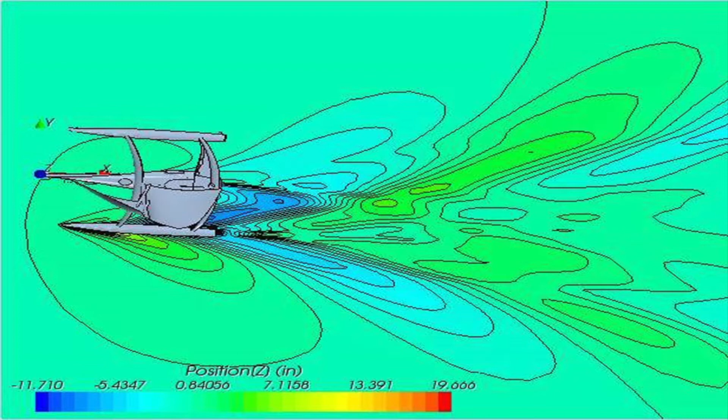The two of us worked with Long Beach State University to do the first coupled aero and hydrodynamic simulation. You can see in these stills that as the boat's moving through the water, you're seeing the pressure as it moves through water, and also the streamlines of how it's moving through air.

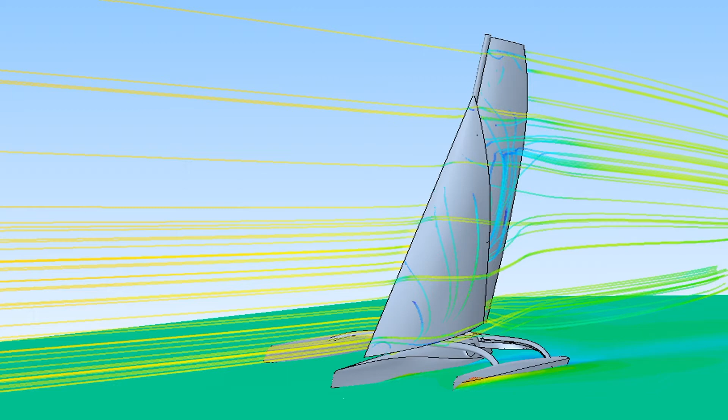What was incredible is it would take a cluster of 64 computers a week to run through one simulation for us. So on a weekly basis, we were changing the design based on what we were seeing and how it was behaving in this environment.

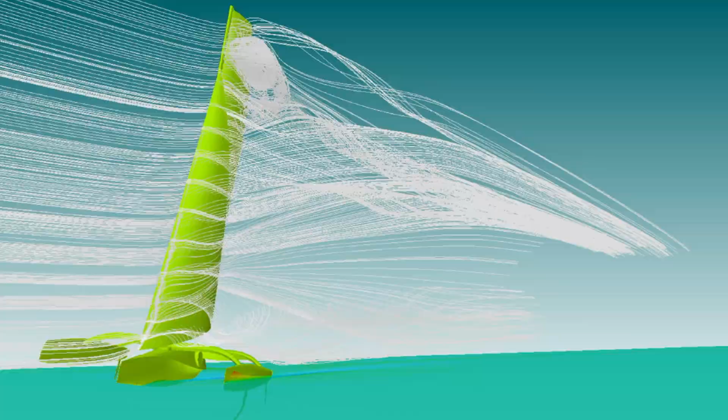We would literally take geometry, drop it into this environment, and with no animation, no keyframing, it would just take off. Because nobody was ever driving it, it always ended catastrophically. But every time, we were learning things about the dynamics of how this was working.

A lot of the decisions we were making about where to put buoyancy, how surfaces were going to move through water, how chines and elements like this were going to keep the boat from flipping over end for end, and how it would shed water as it moved, was verified in the performance.

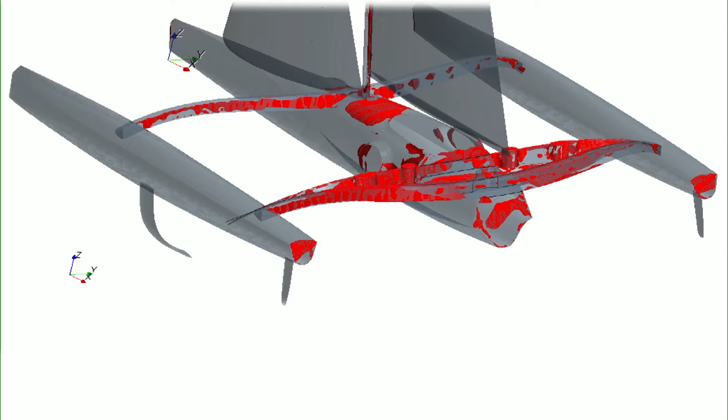I'll show you a couple quick videos. Also how air was detaching from the surfaces, which would create drag. This is a boat that goes a little over 30 miles an hour with just wind, and at that speed, drag actually becomes an issue just like it would with an automobile.

There's also a lot of 3D printing on this. The most critical components of the boat were all 3D printed carbon components. There's almost no metal on the boat whatsoever, and it was all built from CNC manufactured molds.

So what you were seeing in that simulation in terms of how the hulls are in the water, what kind of wake they're generating, and how the bows of the boat are handling water and buoyancy, was really a high level of fidelity between that dynamic simulation using computational fluid dynamics and the actual performance of the boat. Nearly no surprises.

As a matter of fact, some of the concerns we had were verified in things in the real boat that we've now gone back and retested and remodified, but mostly the foils, which are those big orange things that lift the boat out of the water so it can fly.

But anyway, the video footage and the simulation footage almost always matching, like one-to-one, with a very high degree of fidelity. If I could now bring that together in a moment, especially with augmented reality, where I could start to see those forces happening in real space.

The boat is also covered in sensors, both speed and stress and wind direction, and it has a computer on board. So if I could start to pull those things together in real time, which is what they're doing in the America's Cup boats, you get even more insight.

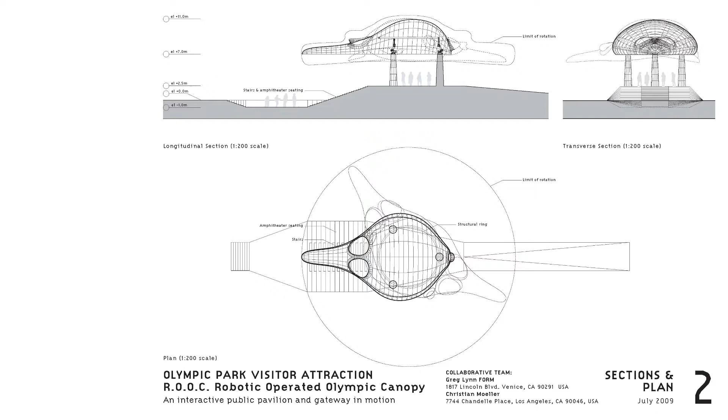I recently started to think about what parts of a building could you move, and how could you integrate robotics into structures. So a few years ago for the London Olympics, we were asked to propose a pavilion.

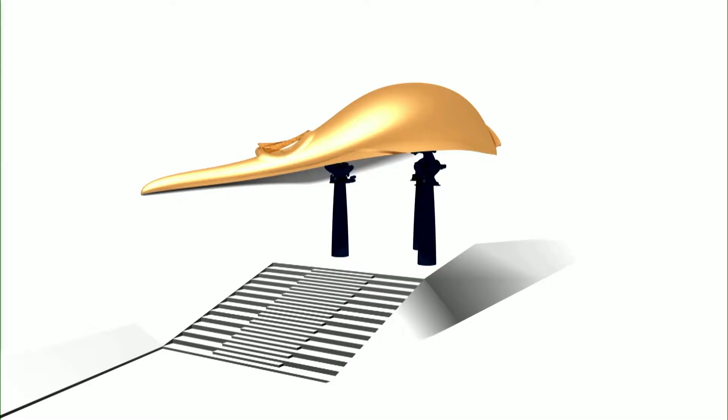Here we integrated just three. We were thinking about KUKA Titan industrial arms, but three industrial arms that could move a lightweight shell and spin it. But I've started to think about how to integrate robotics into building scale structures.

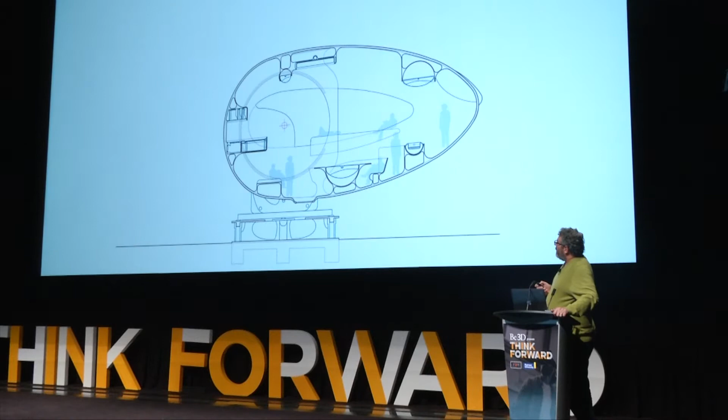Being able to visualize the motion with solid elements that can collide with each other lets you simulate that. I don't really think so much is important about the architecture here for this context.

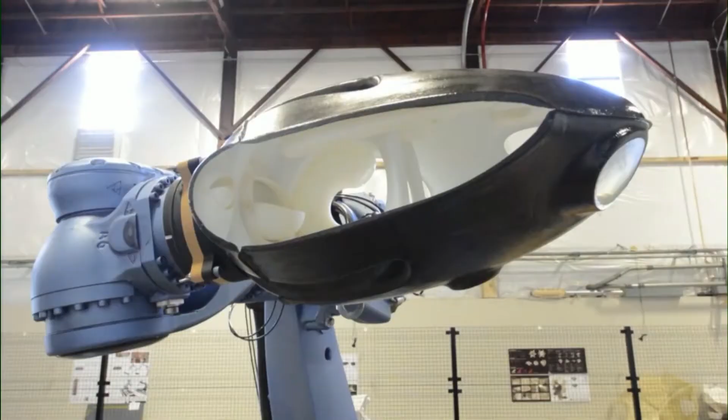I think it's more just about how it's kind of moved across disciplines and fields. This is in a robotics lab at UCLA I've got, where we use these large-scale robots to move models and even rooms around.

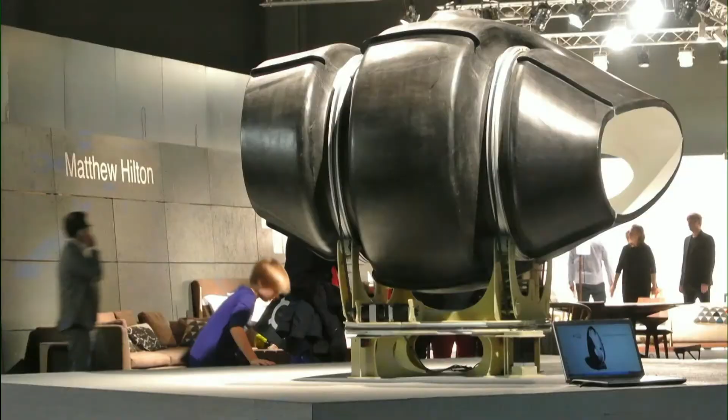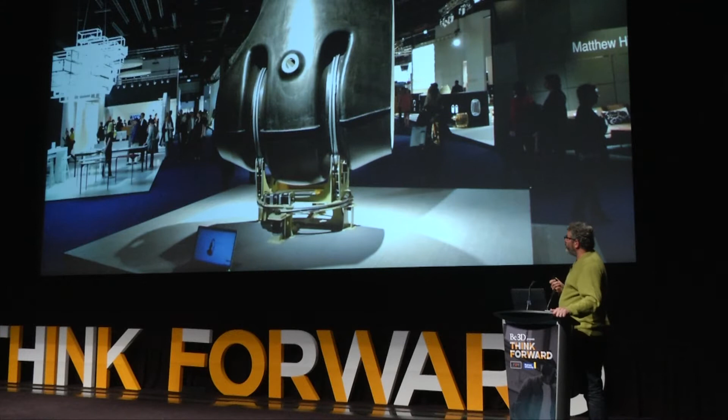In building one-off robots to study some of these elements, I got in-house the people necessary to do both the mechanical engineering and mechatronics—building the robots—as well as people to program them. I kind of accidentally started to move into a different space.

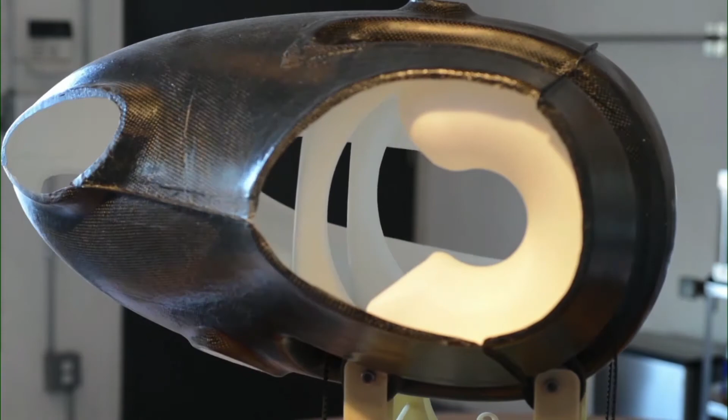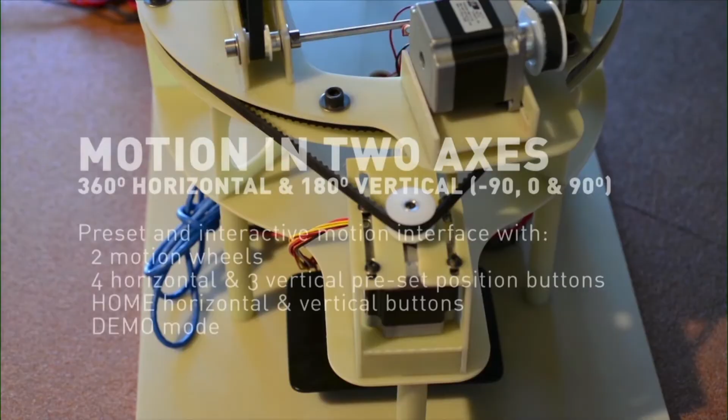The San Francisco Museum of Modern Art wanted to include this in an exhibition, and I said instead of having it just move on a loop, we should let people download an app on their smartphone and drive it. Using TouchOSC, a music mixing program, we built an interface where you could move the models interactively just by downloading an app when you walked into the gallery, uploading our screen onto it, and then being able to move this thing and run it through some presets.

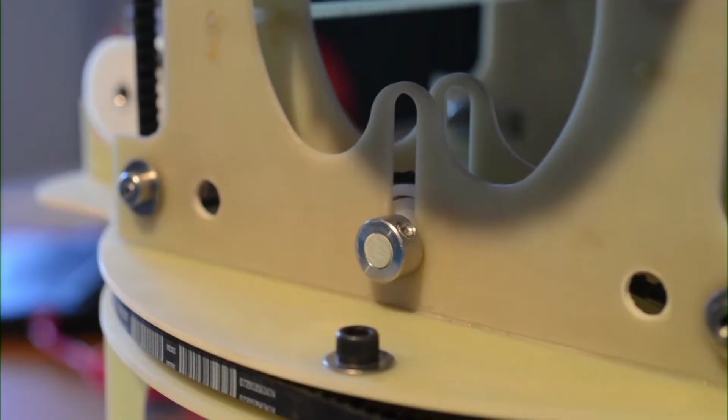So the ability to build the machine, control the machine, and then interact with people socially in a space really started to spread out some of the expertise horizontally, in a way that was pushing me a little bit.

Around that same time I met Jaron Waldman, who started a company called Curbside, and that immediately became relevant in terms of, let's say, little buildings—but more important than little buildings—in terms of how people move through cities and transportation.

It got me thinking a lot about—well, I would never say where the future of things is, because I don't really believe in 'the future of things.' I'd say opportunities in urban planning. I don't think anything is necessarily going this way; I just think this is where I would want to make things go, and it's an opportunity to be taken advantage of.

What Curbside does is turn a shopping mall or big box store into a fulfillment center. Instead of having a big fulfillment center outside the city shipping everything—so you order a tennis shoe and it gets hurled to your door by a drone or delivery person—Curbside tells you where those tennis shoes are in stores around you. You buy it, somebody pulls that inventory out of an existing store. So instead of pulling inventory from a fulfillment center, it pulls from all the neighborhood stores participating in Curbside, and they consolidate that.

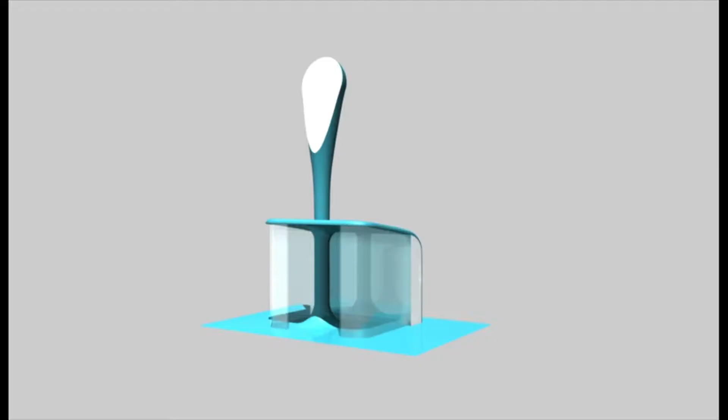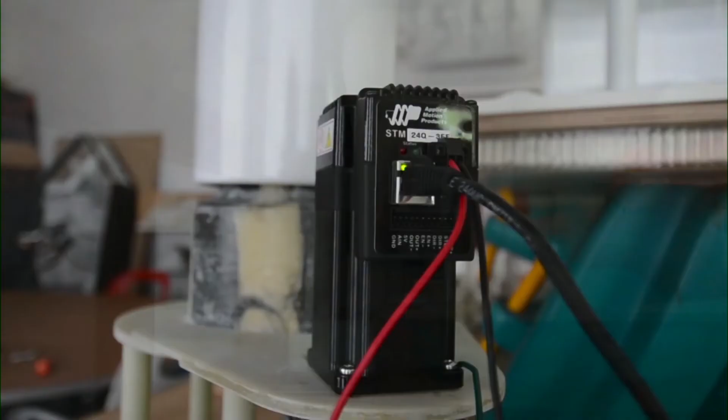The last thing we're doing now, as we look at installations with more than one pickup point, is we want you to know which one to go to—so we can localize you down to even one of, say, three pickup pods. We've got an antenna now that follows your cell phone signal and changes the background of your phone to match the color of the pin, so they know who you are, and you know which pod to go to.

So this kind of transportation and urbanism world has become very interesting. I want to show you something else we've been doing, but before that, I thought it would be nice to show you what I've been doing with Trimble and with Microsoft HoloLens.

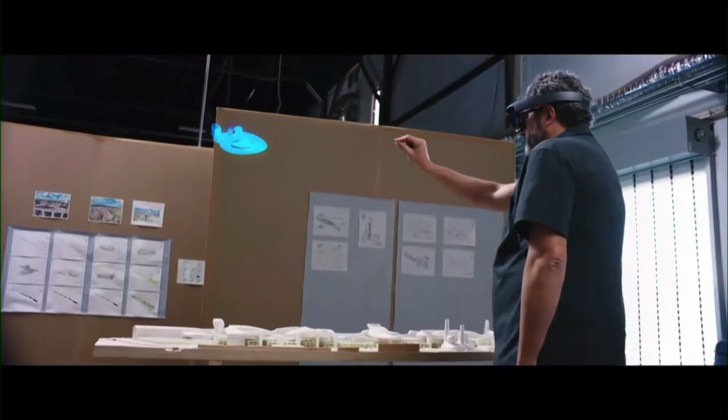How do I bring some of that virtual stuff and lock it to a physical model to give us a sense of scale, proportion, form, and space? Microsoft HoloLens is a wearable computer that lets you see holograms mixed with reality. It actually changes the way you think about design.

I live here in Venice, California. I teach at UCLA in the old Howard Hughes hangar. We were asked by the American Pavilion at the Venice Biennale of Architecture to be imaginative and show what's coming with architecture. We were given a mile-long building in Detroit that's been abandoned for 50 years to use our imaginations on. I'd known about the Trimble Microsoft partnership on the HoloLens and was just itching to find the right project to do a pilot with it.

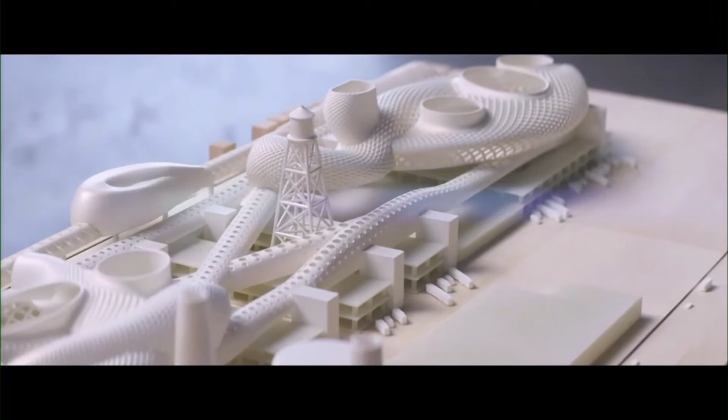So we built a model, but we used HoloLens to get us inside some of those spaces. I didn't know how big our site was compared to corporate headquarters or museums. With Trimble Connect, I can look up and grab different buildings to compare. We could just pull a model and duplicate it and see that it would take 12 Tate Moderns to fill the site. That brought it to life in terms of use.

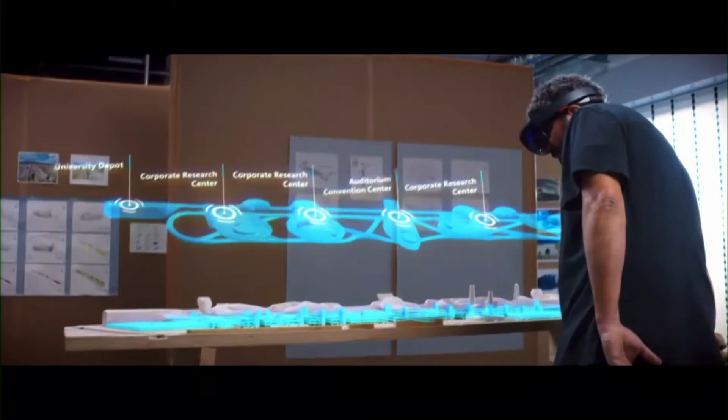Microsoft HoloLens lets us get inside stuff earlier and experience it, and I can look up and see the volume that I'm in and start to make decisions about how to design it. Without a HoloLens, I would have been making those decisions 3-4 months from now. But with the HoloLens, I'm making those decisions at the moment of inception.

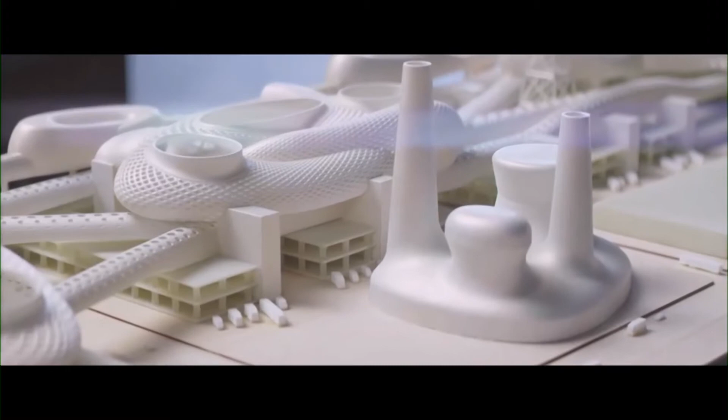In the redesign of the Packard plant, showing the dynamics is something that's very hard to do. HoloLens immediately solved that problem, and it explained why things were the way they were because they were meant for vehicles and people to move around. I think that gives you a little bit of a sense of how that technology works.

Crazy interesting to see what the world of entertainment and gaming is doing with these technologies. But for me, what's the most impressive thing about the HoloLens is, again, its localization—that it's building, as you move, a dynamic 3D model of the environment you're in that has enough fidelity that I can set something on the floor and it actually sits on the floor.

And if I walk out to the cafe and come back in, that device is going to recognize the room. It's going to recognize that position on the floor, and what I set there is still going to be there. For me, when I got the first HoloLens in my office about 8 months ago, what was incredible is we opened a bunch of files.

I put the device down, I came in the next morning, I put the HoloLens on, and all the stuff that was sitting there was still sitting in the right place. So that ability to know and map an environment is incredible.

So what you saw happening where I was dropping modifications onto a model, it's great to be able to see virtual things in the physical world, but what is amazing is that it is looking at that model and matching it to the 3D model that we've got and being able to bring those two things together.

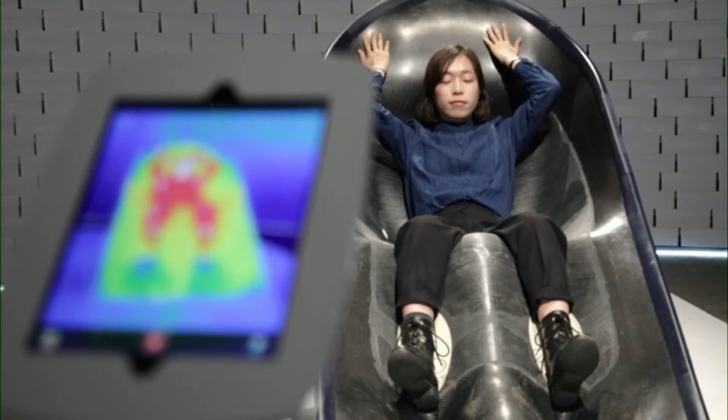I'm collaborating with Nike doing these chairs, which we call the microclimate chairs. But what we're doing is we're designing

temperature and moisture controlled environment in a very lightweight piece of furniture for elite athletes. You'll see these with the NBA next year. What we do is both modify an athlete during the state of play, but we're also pulling data off the athlete during the state of play. Pulling the data off is probably more, well, they're both very significant.

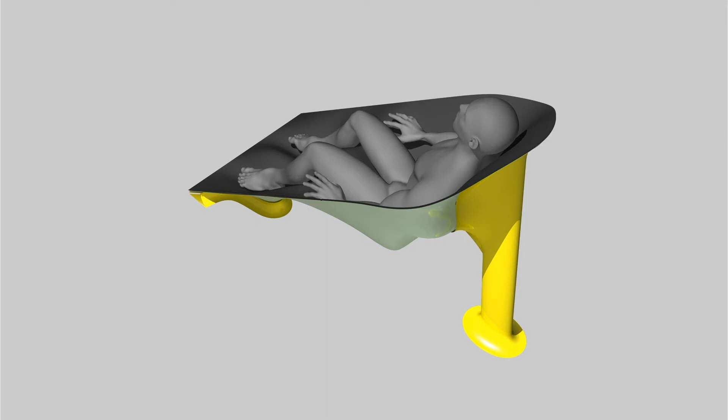So what we do is, the first one we molded actually on an athlete, but we found out we don't need to have such a tight fit between the chair and the athlete. The material is a material which I wouldn't really say we've invented, we applied for the first time.

It's a carbon fiber which goes continuously from being rigid to soft. So where you see those patterns of tape, it's soft, kind of like a hammock. It holds its shape till you sit in it, and then it turns into a tensile surface.

And embedded in that, we can put a bunch of Peltier chips, which you can control from hot to cold by changing the electrical current through them, as well as a series of temperature and moisture sensors. And also we weigh the athlete, so every time they sit in the chair, we know as a baseline if they're

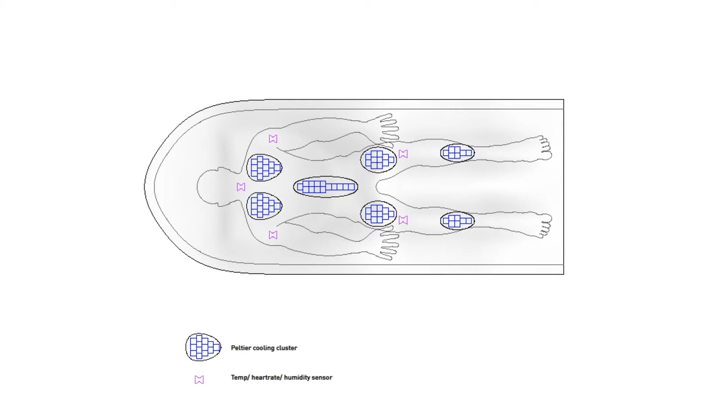dehydrating based on losing weight. There's a bunch of heat sinks to dissipate the heat that we're pulling off the athlete.

Although really, and we don't tell the athletes this, what we're doing is cooking them, because you want to keep them hot. So we blow air on their face, and we chill their spines, and we chill the back of their necks so they feel like they're being cooled, but actually we're raising their body temperature and we're heating up their legs and arms so they don't get stiff.

The very first prototype we did is much more reclined. We don't have this kind of real estate on a basketball court. But you can see the thermal camera taking the video of the temperature of the chair.

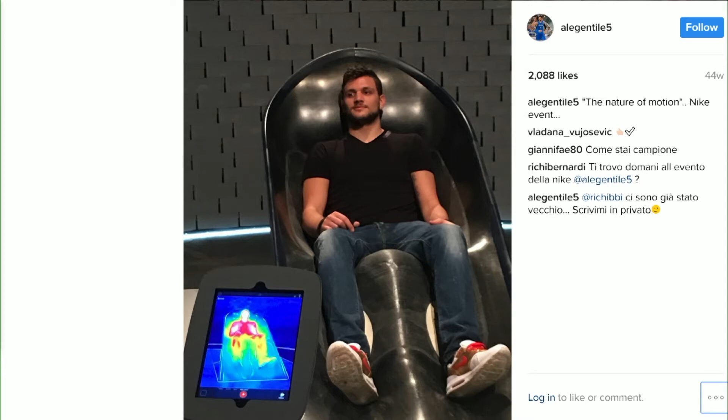This is Alessandro Gentile. He's bigger than me, much fitter than me. He's about 6'6", 6'7", which is your average NBA athlete. So that's the size it was made for them.

But so we're pulling information off of him. Even through the clothing, we can get a lot of temperature sensing. The perimeter of it is all a 3D printed air channel that blows air onto his face.

And also even, you feel it on your arms and legs, but we want to get as much of the arms and legs encapsulated in there as we can. So it's really like a tiny little oven. And there's some of the thermal imaging of it.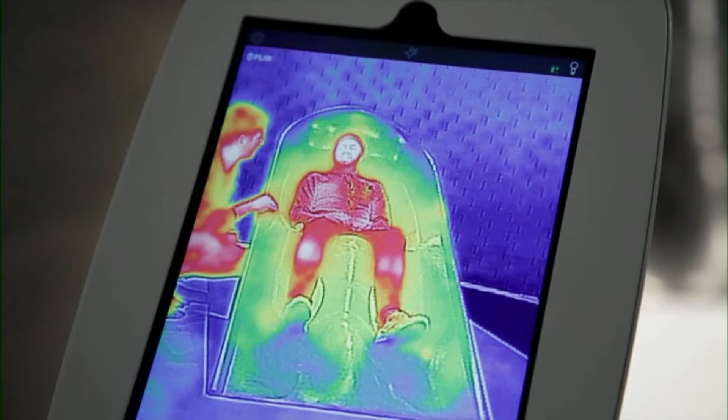So, building a microclimate like this, which is intelligent and is pulling data and modifying data, it's funny, it's something I pitched to well, three of the largest furniture manufacturers in the world, two of whom I have furniture in production with. They all said, we know we have to do this, but we don't want to, so come to us when our competitor's doing it. Whereas I just casually mentioned it to John Hoke from Nike, and he immediately said, we need this, we feel like we're 5 years behind, let's do this right away.

I know exactly the sport we should do it for. So for me, it's this ecology of machine vision, whether it's stresses and forces and environment, whether it's people and their temperature and their body state, whether it's a 3D map of an environment and mapping how many people are in it and how they're moving and recording it.

Being an architect is really now completely changed in terms of responsibilities and opportunities. So I really think it's now about not designing spaces for machines, but designing spaces for people and machines to work together, to move together, and to have a kind of intelligent fusion. And the obvious place where people and machines are working together the most are factories.

This is some footage from that Packard plant, which was just a kind of hypothetical project done for the Venice Biennale. But our idea was to take this existing factory and think about what it would be today if you were to bring in a fulfillment center and a manufacturing center and a university all kind of onto the site, like Cedric Price did in the 1970s.

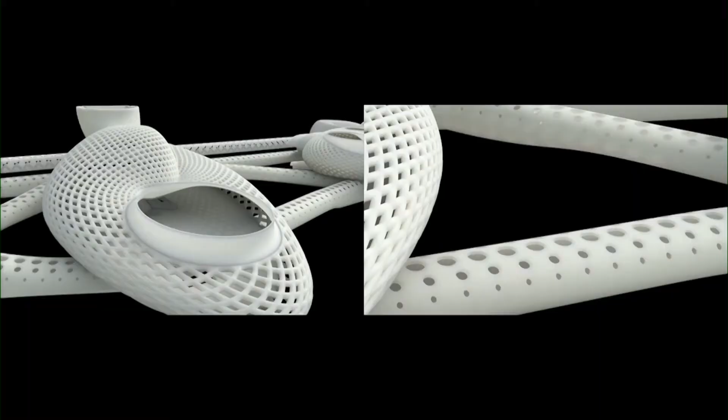And what we came up with was this idea, instead of a gantry, which is a crane that moves things through a factory, which is the old idea of a factory, to think about a kind of a little mini freeway for everything from the scale of a forklift or pallet jack, which is automated, down to small, lightweight point-of-use carts that might move around. So people and machines, the people would move on the first 3 floors, and machines would move, instead of in a gantry, in these kind of tubes.

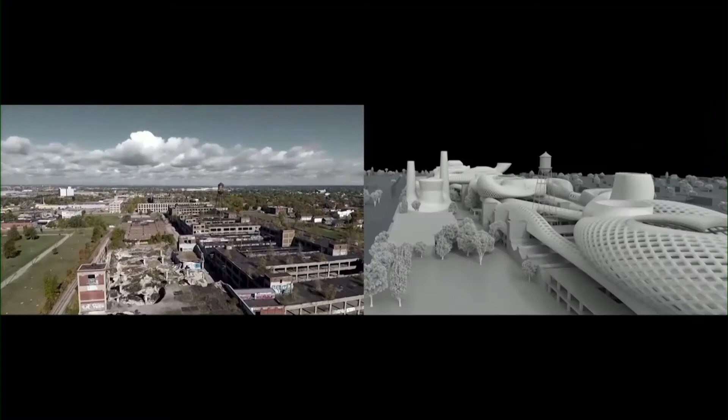I'll show you how in the last couple of months this has moved to a real project on Lake Como in northern Italy, which is also an old factory.

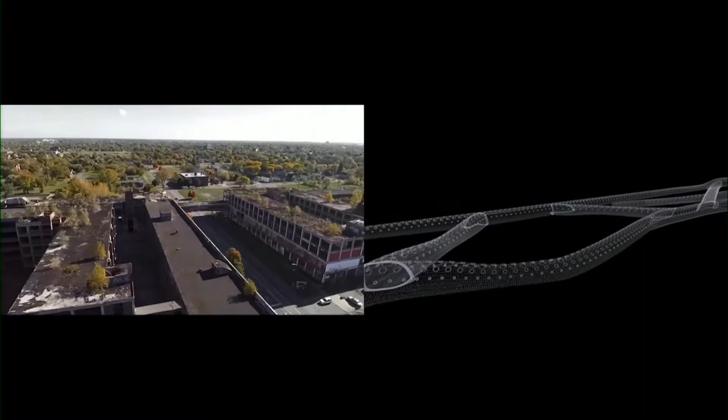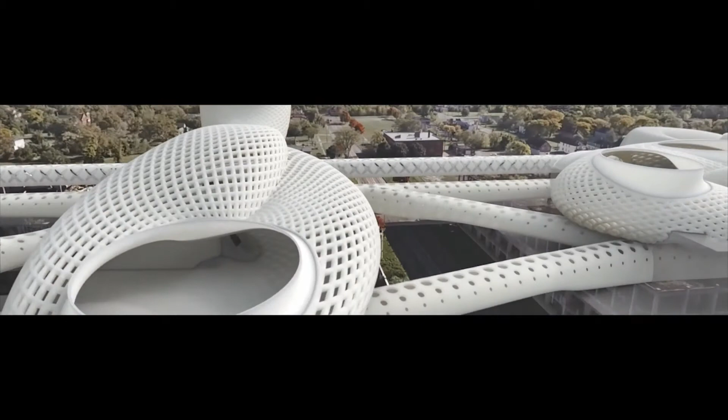For this project we shot everything with aerial drones. I went to the site, but frankly I spent most of the time looking over the shoulder of somebody with a tablet with an aerial drone. We were using the HoloLens. It was a fusion of all these things.

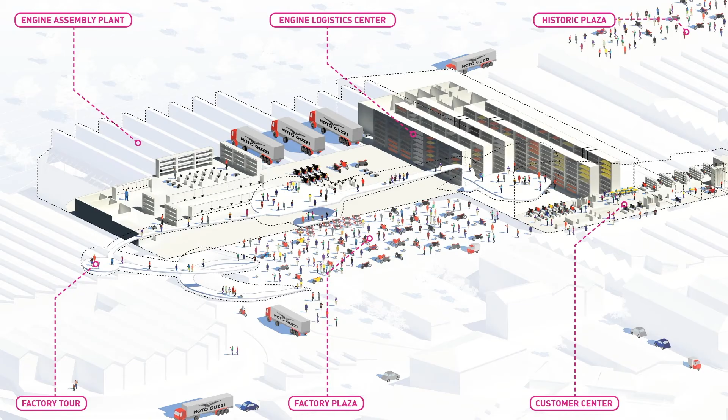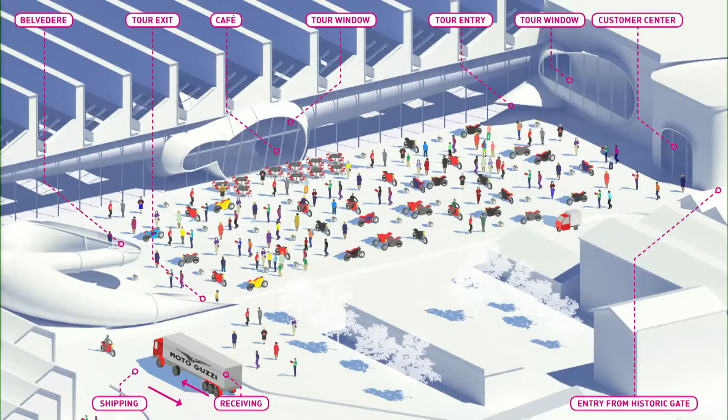In Lake Como we're now doing something similar for a smaller scale renovation, where we're building a new engine plant and plugging into an existing assembly plant. You can see we're building a plaza so people passionate about the brand can come visit the Moto Guzzi factory, but instead of having the people only moving through the factory, they get into this tube and get led by machines through a view of the factory, entering spaces where it'll be primarily machines doing the work.

That has led to a foray into vehicles, but really my role here is not so much designing the vehicle - which is my job, I have to design the vehicles - but really we're trying to design cities, design sidewalks, and provoke a new kind of fusion between people and machines. It came out a little bit from this.

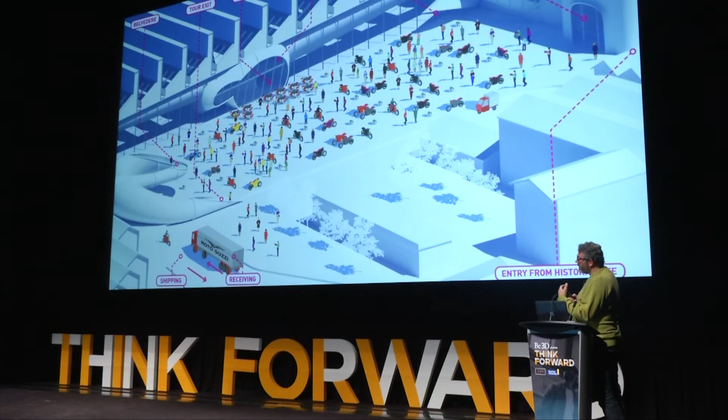If you see these little balls around for scale to the motorcycle, we had an idea that the path people should be led around, they'd be led by these little guides. Our idea was primarily to have something autonomous that would do that. What ended up coming out of this is something which is not autonomous at all, but something that's all about the partnership between people and machines, or people and robots.

A year ago, I co-founded a company with Jeffrey Schnapp and with Piaggio - Piaggio are the people who invented the Vespa - called Piaggio Fast Forward. It's all based on what you call SLAM, or simultaneous localization and mapping.

That's how HoloLens works too, it has stereo cameras and does on-the-fly SLAM, using those stereo cameras to localize and map. So it builds a map, puts you in that map space, and compares that against the world continuously as you move.

Our idea is really that we're starting from people and what people might want in the city. So you see that person, Jared, getting followed by our vehicle - I don't call it a robot, it's a vehicle. It carries 40 pounds of stuff and follows him in a very sophisticated way. It's building a 3D map of the world.

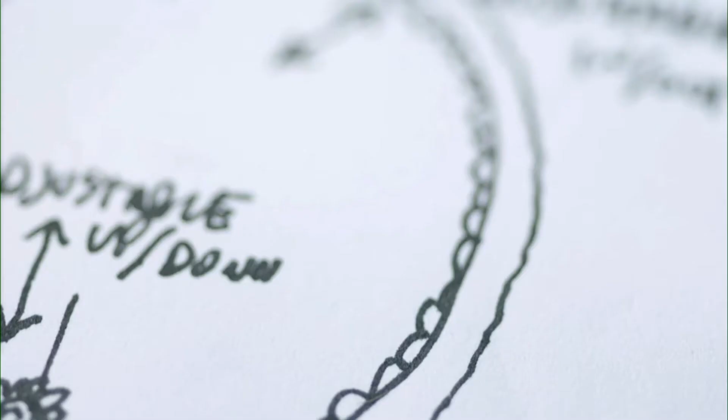Because we come from Piaggio, we see cities in a different way than an automobile company. We think about people moving in a granular way. Granular mobility is a concept we've elaborated within Piaggio Fast Forward to call attention to those spaces that we navigate as pedestrians, as citizens of the 21st century city.

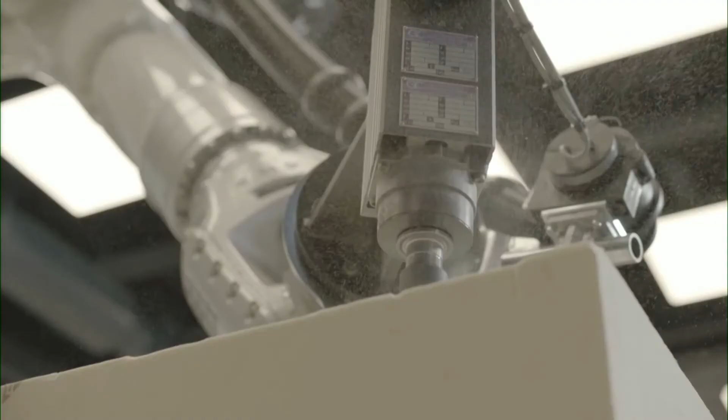We thought, let's try to make a product which engages all those different cities and the way people move in all those cities. Gita was designed to leverage the power of human navigators of urban spaces to make sense of them. We imagine it as a kind of Vespa for the 21st century.

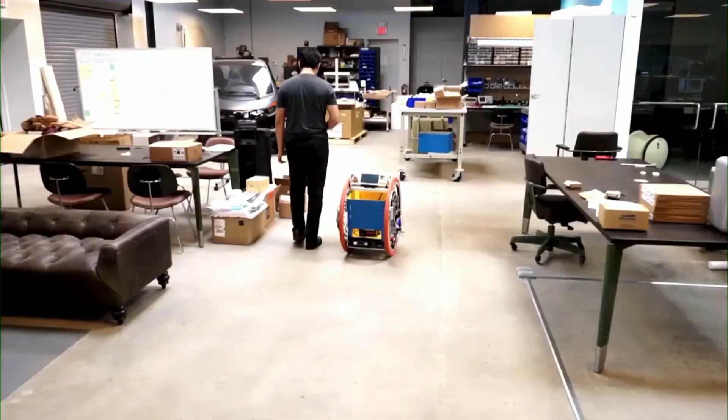Gita is thought to help the human, from a young kid at school to an older one in a hospital, for instance. It's a total fusion of two technologies. It's a land drone, it's a cargo bot, it's a Sherpa, and it's a smart device that learns the environments and maps them as it travels them with human guidance.

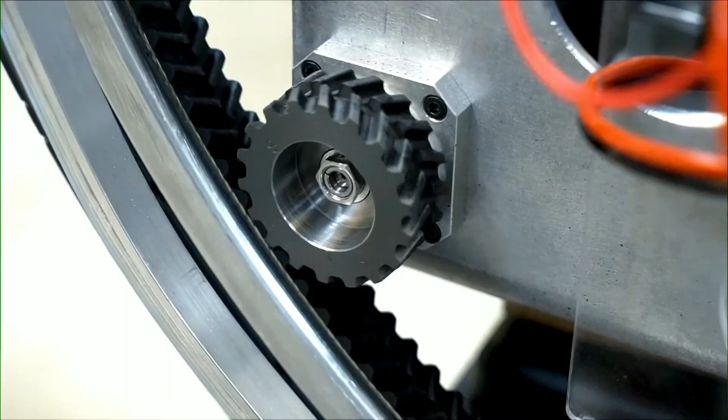It moves as slowly and can maneuver the same as a human, and it can move as fast as a human can run, and everything in between. It can also comfortably carry about what a human can carry.

Gita has two main purposes. It is thought for goods transportation, for people transportation, and to mix them to help people.

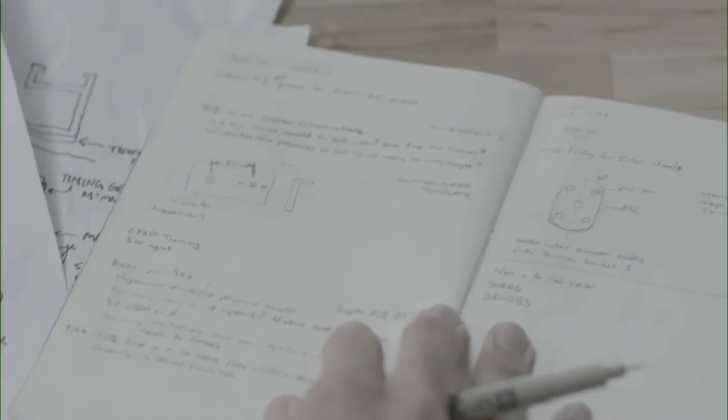And we see a future where city streets are not full of autonomous cars, but people walking, jogging, riding on lightweight devices like skateboards and bicycles. We believe that the 21st century will be the century of robotic movability.

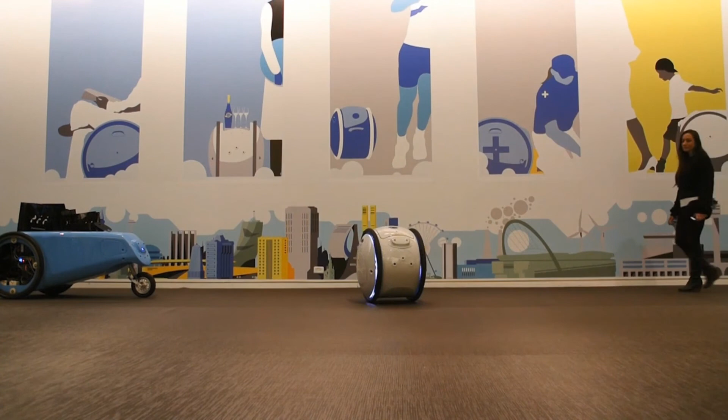Okay, so here you see three of them following three people in a really small space.

But I guess in kind of closing, for me, this is augmented reality. This is literally exactly the same as a HoloLens. It's building an environment. It's making decisions about what that environment looks like, what the surfaces are that it can move on, what's an obstacle. It knows what a person is, so it can delete people out of a scene in terms of building the three-dimensional scene. The only thing that's different is it's not about putting that now on my eyes.

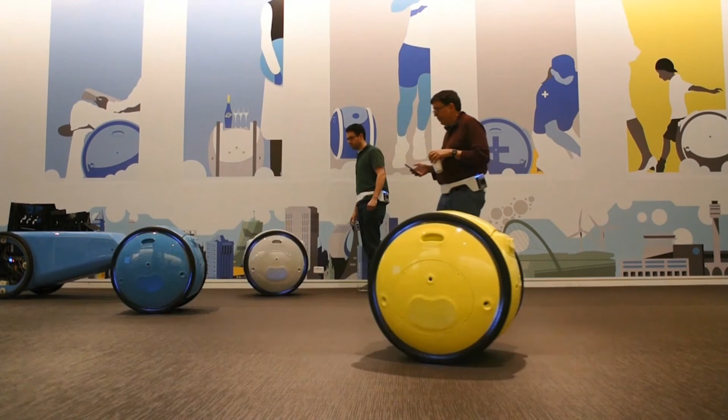This is a machine with vision, and so my job is we've got dog trainers and falconers and horse handlers all coming into the office and talking to us. We're trying to figure out when you go through a door, how do you hold a door for - sorry, the product's called a gita, which means short trip in Italian. So when you open a door, how does it go through? Does it follow behind you? When does it come next to you? When you have to program it, meaning sync up with it, it gets in front of you. We're trying to figure out what's the protocol spatially to interact with a robot in an environment.

But for us, this is a world of augmented reality. It really is exactly the same technology as the vision technology. It's a different experience, like being with a robot, than looking at something superimposed on your field of view. But it's the same ecology. And by the way, as we're hiring engineers, we're competing with Hollywood and HoloLens. We have to pay the same salaries, we're looking for the same people, exactly the same job description as somebody working on a 3D augmented experience for Hollywood. So it's really part of that whole ecology, I guess, is what I would want to say.

And for me, my perspective is really not the product design of this thing. It's about changing the way people live in cities and being a spokesman for the citizen and for the civic space. It's kind of hard to show that, but it's embodied in this object. It's why you don't ride on it. It's why it makes you move and hopefully makes people walk more or ride more.